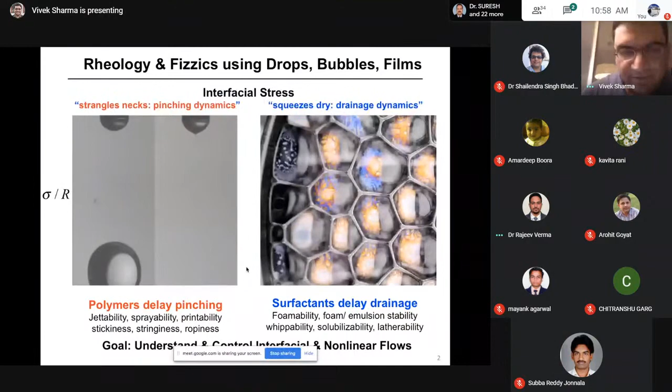And let me just check if you can see the movies as well. Yes, yes, they are moving. And now I can see slide number two. Okay. Yeah, the animation is also here. And is there a lag? So, I'm going to play the second animation now. Yes, we can see it. The colors are changing. Okay. Perfect. And you see the entire screen. Yeah, we are seeing the entire screen. Okay. So within a few minutes, we shall be starting with the session at 11 sharp. Okay. Yeah.

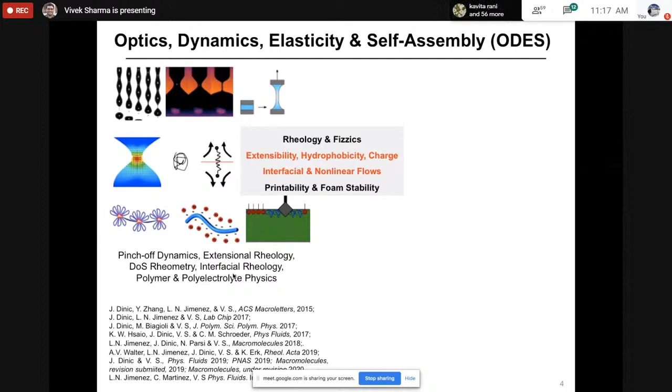I mentioned briefly that our group also spends a fair bit of time and effort on understanding foam film stability, and in some sense, both these key projects involve interfacial and nonlinear flows. They involve questions that are related to hydrophobicity and charge effects, and I mentioned some of these yesterday. And these are all rather practical problems, but we pursue them with an eye on some very fundamental questions about polymer science on the left-hand side and surfactant science on the right-hand side, as well as fluid mechanics.

So in the first 6 years or so of my tenure at UIC, we tried to focus only on either polymer solutions or on surfactant solutions, whereas in the last year or so, also motivated by a number of broader problems in environment, health, food, and so on, and the funding that has been coming from industry, we are now motivated to think about multi-component complex fluids.

And my overall quest is that all the information that I'll provide to you today is going to be helpful in creating meat and dairy alternatives, where we'll use the knowledge of how polysaccharides and proteins behave to maybe get food materials that have the nice texture, mouthfeel.

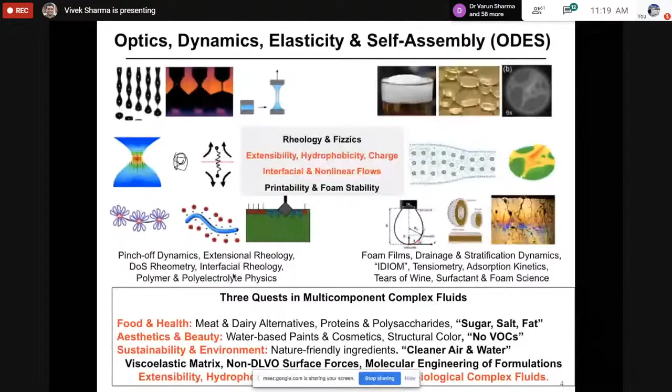All right, so I'm going to venture to define some of the terms that we'll be repeating again and again, and maybe the next 5 or 6 slides are at a very introductory level, so you can think of these as a quick revision. So rheology is a study of response to deformation. And when we think about response to deformation, we can define it in the following sense. We poke a material and then we measure the response to either an applied stress or an applied strain.

So the key idea that we want to remember is that when we apply a particular stress and we observe a particular strain or strain rate, there is typically a proportionality that is based on material properties, and understanding what those material properties are in context of design of new technologies as well as processing is one of the key aspects of molecular engineering or formulations. There's going to be a fair bit of mention of non-Newtonian fluid mechanics and how we characterize rheological response, especially extensional rheological response.

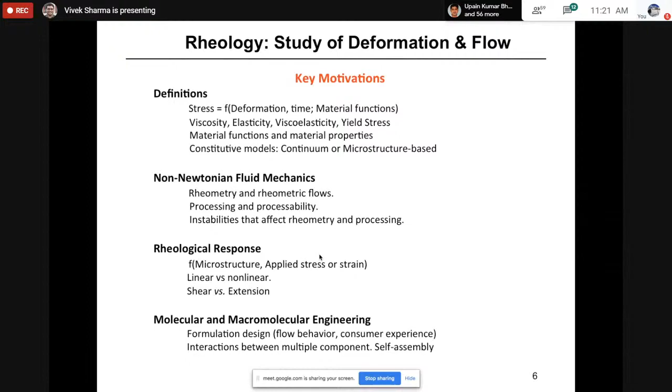And then hopefully through those discussions, you'll see how we combine these ideas, macroscopic measurements and molecular or macromolecular understanding to come up with new design principles, to come up with better formulations or utilize less material to get the same consumer experience of flow behavior. So if you go back and look at the key definitions for solids, stress is directly proportional to strain. This applies for both the tensile stress and the shear stress.

And in case of solids, this law is attributed to Hooke, whereas in case of liquids, perfect liquids, whenever we apply a deformation, we can't really get a strain, we get a strain rate because in response to stress, fluids flow. And in that context, the resistance to flow is characterized as viscosity. This is something we teach undergraduates, graduate students in all different courses, and I think is as familiar as can be to most chemical engineers, material scientists, mechanical engineers.

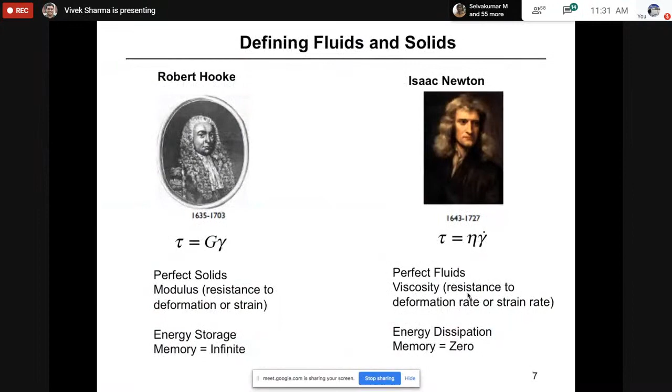Newton and Hooke were the two people who came up with the idea of what a solid is and what a liquid is, and they both didn't like each other too much. So they would have been appalled if they had survived to see Maxwell take their individual models and combine them into a model for what is the simplest model for viscoelasticity.

In the simplest model for viscoelasticity, Maxwell combines a dashpot, which has viscous response, with a spring that has elastic response. When you combine these together in series, you end up with a constitutive model called the Maxwell model.

If you apply a step strain, pull it by a certain amount and then stop, the gamma dot becomes zero, and you're left with a simple differential equation. If we solve this and define modulus as stress over strain, it gives you the idea that if you measure stress as a function of time, the amount of stress required to maintain that strain decays exponentially. The decay constant is this time scale called relaxation time, which in some sense is the ratio of viscosity to modulus, contrasting the viscous and elastic effects.

A Newtonian fluid has no memory - as soon as you stop the flow or deformation, everything stops. Whereas in a Maxwellian fluid, if you apply a certain strain and then stop, it can recover part of the deformation.

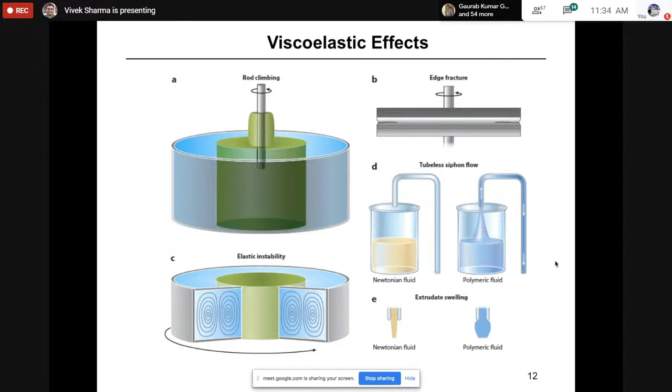They're expected to have a high shear viscosity at low rates that allows them to stick to a substrate or wall if it's a paint, or to not flow too much if it's a cosmetic poured into your hand - a hand cream, lotion, shampoo, or conditioner - it's supposed to pile up. However, when you're trying to dispense or spray it, it's desirable to have as low viscosity as possible. That's something you've also seen in toothpaste, where squeezing the tube makes it more mobile so it comes out, but once it's on the brush, it recovers its high viscosity and stays there without flowing away.

So most of the time people think about shear thinning and design everything based on it. And the key idea that I'm going to emphasize again and again is: this measurement alone is not enough.

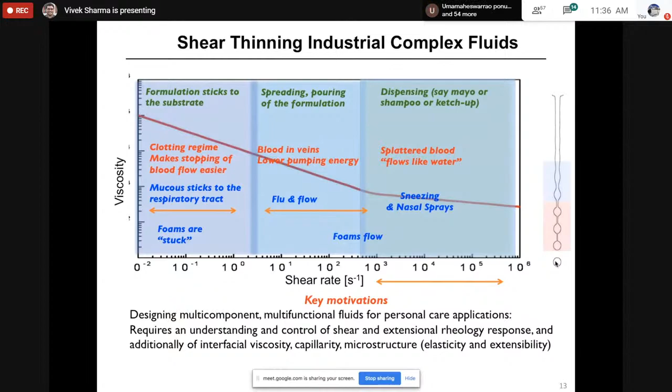Materials that have the same or similar shear thinning behavior can be quite distinct in terms of processing and additive manufacturing, especially if extensional deformations are involved, especially if drop formation is involved. I'll discuss why in coming slides.

In a lot of applications I'm interested in, paint forms a pretty good example of a multi-component system. Paint or ink usually has a pigment, a polymer, and other additives. There's a range of things we need to control for. We desire high viscosity to prevent pigment settling at low shear rates, whereas when we're really using the paint, by brush, roller, or spraying, the deformation rates are high, and it's desirable to have low viscosity that leads to less power consumption. If you're using a roller yourself, lower viscosity will mean you won't get tired as easily.

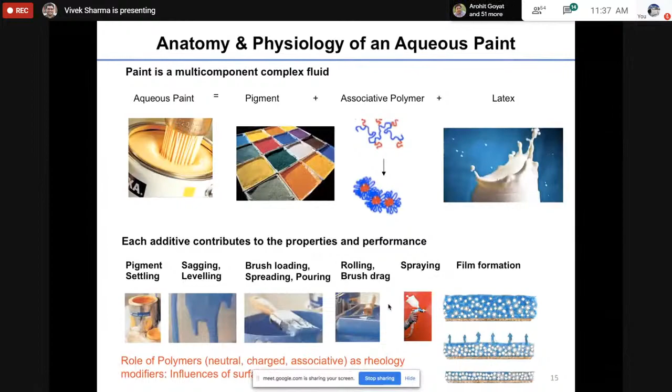Understanding the role of polymers in manipulating flow behavior is a key aspect. This is important not just for architecture paints but also for designing nail paints. Just like architecture paints, nail paints also tend to be designed to have similar shear thinning behavior.

They keep a similar viscosity versus shear rate profile, which saves a lot of headache in terms of changing processing conditions when going from one color shade to another. Most of these nail paints have nitrocellulose as a polymer additive, with an organic solvent that evaporates, which is why you can smell a strong volatile organic compound when using nail polish. There's some motivation now to replace this with aqueous based nail paints.

Here we were interested mostly in showing that even though there's accounting for pigment settling to brush drag through designing shear viscosity versus shear rate plots...

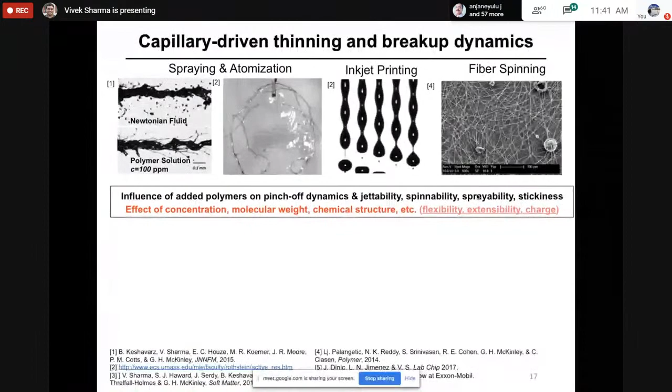So what we are most interested in is understanding the influence of added polymers on pinch-off dynamics, jettability, spinnability, sprayability, and stickiness, and how these affect dispensing behavior.

Now, if I look at a liquid jet issuing out of a nozzle, most of you have seen a liquid jet every time you turn a tap on. What you can visualize, if you had access to a high-speed camera, or in this case strobe imaging, allows a time resolution of a microsecond.

Here is a water jet, and as this water jet issues out of a nozzle, eventually surface tension-driven instabilities arise, which cause the neck to have a sinusoidal instability that results in formation of droplets. You can see very nicely a satellite droplet forms, a large primary droplet forms, and if you examine this movie, you'll see that before pinch off there's a very nice cone that forms, and that cone converts into the satellite drop.

If we add a small amount of polymer, 100 ppm or a few hundred ppm, that changes this breakup dynamics completely, and now you don't have any of those satellite drops, and pinching takes maybe slightly longer.

If you can avoid satellite drops, that would save a lot of money when you're trying to spray paint things, and it also saves a lot of extra fertilizer, insecticides, and pesticides that get blown away because the drop size is too small, so they can't really land on the plant and lead to all kinds of pollution.

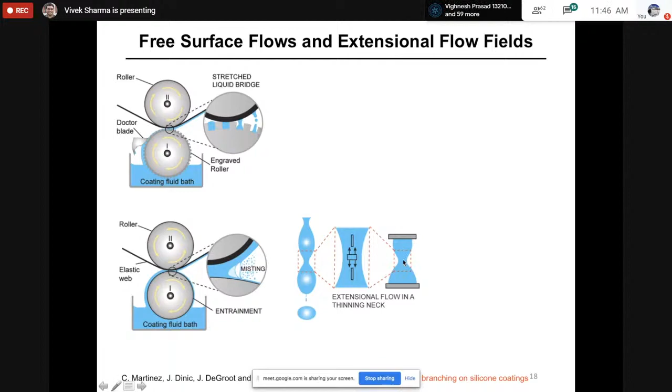So it turns out, in both these cases, there's formation of either a stretched liquid bridge with a neck, or a cylinder that converts into a sinusoidal shape that again has a liquid neck. In these necks, as the liquid is being squeezed out, the flow field is such that a control volume will get stretched in the direction of flow. Such flows are called extensional flows.

Those flows are going to be very important, especially when free surface flows or this kind of liquid transfer is involved. Similar flows also arise every time you coat something, dip coat something, or deposit something on a surface. In this case, the additional extensional flows arise because as you approach a free surface, the control volume gets stretched again. So understanding the response to extensional flows is quite important in all these scenarios.

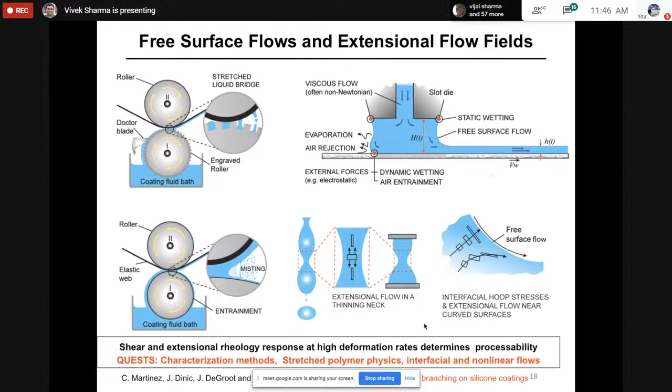And yet, not that many people focus on it. So if we now think from a polymer physics perspective, the molecular response, or macromolecular response, to shear flow can be understood as follows.

A typical shear flow can be created by pumping fluid through a pipe. When you pump fluid through a pipe, there's a no-slip boundary condition at the surface, maximum velocity at the center, and that creates a parabolic velocity field.

On the other hand, if you move the top plate and keep the bottom plate stationary, the momentum transfer in this case is in the z direction. The velocity gradient is in the z direction while the flow direction is in the x direction. So flow direction and velocity gradient are perpendicular to each other.

It's a quintessential shear flow. By controlling this velocity and knowing this distance, we control the shear rate. For that particular shear rate, if you measure the stress, the ratio of stress to shear rate gives you viscosity. Newtonian fluids have constant viscosity. Polymer solutions are shear thinning, their viscosity decreases with increase in shear rate.

The reason viscosity decreases is that if you think about polymer coils exposed to this kind of shear flow, they get perturbed. When perturbed, instead of being a sphere-like shape, they become a little anisotropic and can align with flow, making resistance to flow go down. When you stop the flow, entropically, polymers want to be in their unperturbed state, so the elastic forces bring the polymer chains back. But it takes a finite amount of time that depends on the background viscosity.

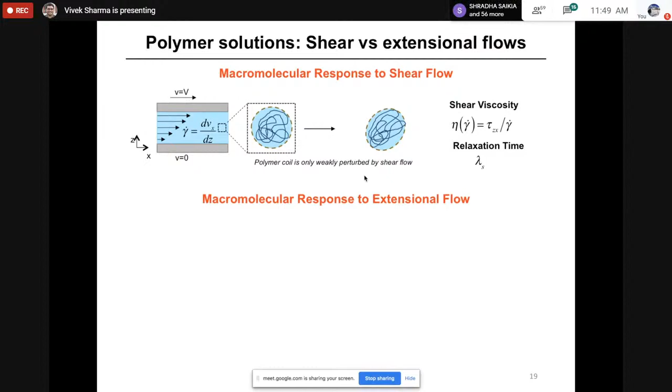What is described in less detail is the macromolecular response to extensional flow. As I said, extensional flows arise whenever you have liquid necks where the squeezing flow generates a velocity field with a velocity gradient in the direction of flow. Similar extensional flows arise every time you have a contraction, in porous media flow, or flow from a large tube into a nozzle, as would arise in every 3D printing situation. Yes, there are extensional flow elements involved.

In extensional flow, because the velocity gradients are in the direction of flow, polymer coils can get stretched quite a bit. There's something called the coil-stretch transition that can take place. When it does, you get a hydrodynamically extended object which provides much larger resistance to flow. The resistance to this extensional flow is called extensional viscosity. It's different from shear viscosity, except for Newtonian fluids, where extensional viscosity is three times shear viscosity.

So if you measure shear viscosity for a Newtonian fluid, you know extensional viscosity because it's a factor of three higher. In polymer solutions, though, extensional viscosity can be orders of magnitude higher, up to 1,000 to 10,000 times higher. This means that if you do shear measurements, a simple way being to take fluid between your finger and thumb and move them backward and forward parallel to each other, that simple shear will show the fluids are similar, maybe water-like. If you add a small amount of polymer to water, both appear water-like in shear.

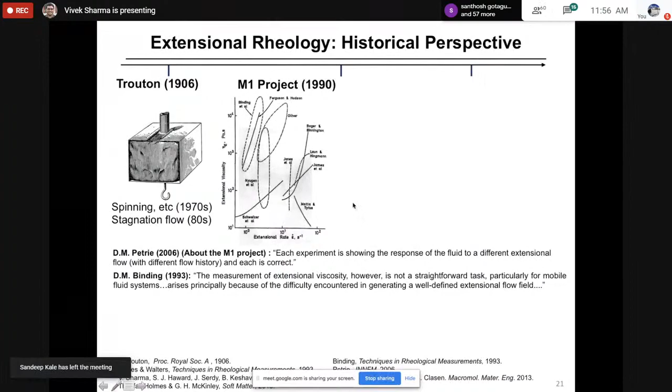Most of these fluids are very high viscosity fluids - the M1 fluid was a very high viscosity fluid. When we think about sprayable paints, inks, or sprayable insecticides and pesticides, the actual viscosity values are rather low and the extension rates are rather high, and most of these techniques can be used for those. In 2015, I summarized all the different techniques that can be used for a given shear viscosity, and here's a map of those different techniques.

When I was a postdoc at MIT, we tried to develop a jetting-based rheometer to get to these high rates and low viscosity fluids. It turns out that when you have viscosity within 10 times water viscosity, it's easy to image this jet as it issues away from the nozzle. But if you increase viscosity or viscoelasticity, the jet flies to such long distances that the experiment becomes hard to control.

In 2013, Clasen wrote a paper saying that unfortunately, extensional flow is difficult to access experimentally, especially for solutions of polymers with low viscosity or relaxation time - really low viscosity systems that are used in inks and form the basis of formulation design in cosmetics and paints and so on.

That remained a big challenge. In the food context, Fischer and Windhab summarized it again around 2013 - I mention 2013 because that's around the time I started my research group. What Fischer and Windhab recognized was that approaches aiming to introduce extensional geometry are extremely useful to understand the material, but they're complicated by the fact that measuring devices are expensive, do not operate on the production time scale, and do not provide instrument readings that can easily be transferred to the process or to the baker at 4 o'clock in the morning.

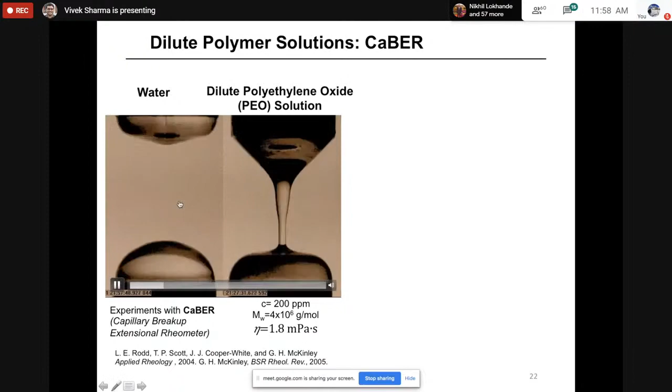So here you see a comparison between water and PEO solution. Even though there's only 200 ppm of PEO added, it delays the pinch-off considerably. Shear viscosity is only a factor of 2 times. So if I took another Newtonian fluid which had viscosity 2 times water viscosity, that would have also pinched off or broken off at a much shorter time scale. So it's clear that polymers produce some viscoelastic stress that delays the pinch-off.

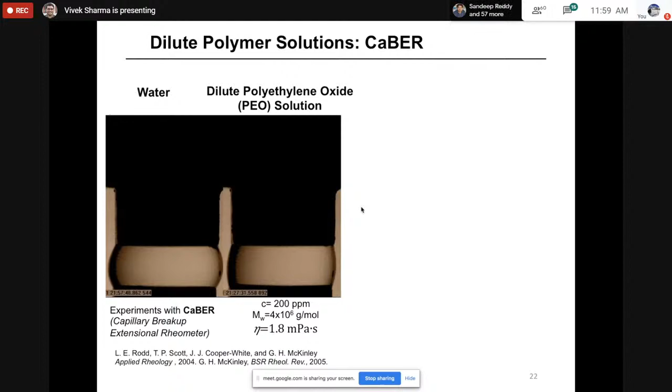And if we examine the neck thinning dynamics, it's well established now that we can learn about that viscoelastic response, and that viscoelastic response is based on extensional rheology. However, for CaBER, you require around 50 milliseconds to stretch a liquid bridge. And even for water, even before the stretching is complete, the pinch-off takes place.

And so for low viscosity fluids, many of the actual inks that are used in every place from bioinks to photovoltaic inks to inks used in inkjet printers, those fluids lie in this regime that is inaccessible in CaBER. So paint companies, cosmetic companies that I've talked to are all struggling with the same problem, that they acquired CaBER, but they couldn't make measurements for many of their actual products.

So when we started out, we wanted to analyze the material, measure the material properties that determine processability. To do that, we had to really understand how to design an instrument that could do this measurement. And our design is based on a deep understanding of fluid mechanics, self-similarity, and pinching dynamics of complex fluids. I'll try to summarize these as quickly and smoothly as possible. And then what I'll show to you today is that there's a fair bit of polymer physics information that can be garnered once you understand the flow physics and you can do these experiments.

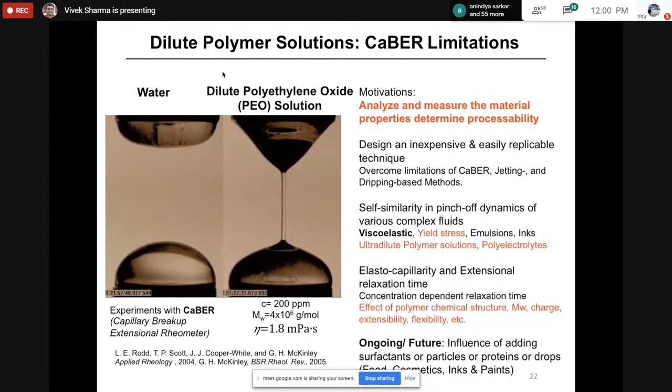The method that we created, we call it dripping-onto-substrate rheometry. And my claim, a claim that you can verify easily today, this afternoon, this evening, is that if you have a camera, even your cell phone camera, even if you're a theorist, you can replicate these experiments and have access to extensional rheometry from today.

So what we do is we create a liquid bridge which looks similar to the liquid bridge that's found in CaBER without using any moving parts. So we take a nozzle, place it at a fixed distance from a glass slide or a substrate, release a finite amount of fluid so that you get formation of this nice hourglass shape. The neck is thinner than the sessile drop and the pendant drop.

The capillary stresses take over, they squeeze the neck, pushing the fluid out, and that neck thinning dynamics is governed by the same balance of forces that applies in CaBER or the stretched liquid bridge configuration or in jetting or in dripping. And by analyzing this neck thinning dynamics, we can make measurements of material properties that influence processability, extensional rheology response, and so on.

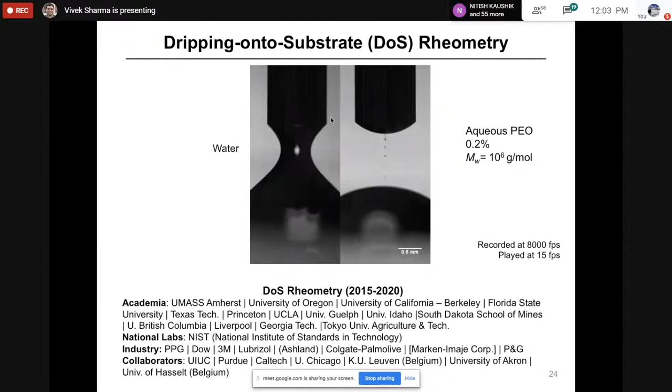So now the other companies, other industries and academic groups, even the groups that have their own CaBER devices, have adopted DoS rheometry. And the key aspect of DoS rheometry is enshrined in these four images. So for low viscosity fluids like water, the neck shape turns out to be this cone, and I also showed you a similar cone in the jetting.

This cone formation is signature of what is known as inertio-capillary thinning. So inertia and capillarity are playing a key role here. If you increase the viscosity, go from water to honey or glycerol, then the neck shape changes completely and it becomes a cylindrical neck. So these are both examples of Newtonian fluids. If I look at radius evolution with time, it decreases with t to the power 2/3. Here it decreases linearly with time.

On the other hand, if I add a small amount of polymer, like the examples we considered before, then this viscoelastic fluid, if we just think in terms of viscosity, still has low enough viscosity that it should behave like an inertio-capillary response, but it tends to give you what is similar to a visco-capillary response. Even though the neck shape is similar to visco-capillary response, the radius evolution gives you an exponential decay. And so that exponential decay can be fitted to get a relaxation time.

Lastly, many non-Newtonian fluids, many power law fluids, many formulations that have more than just polymer in them, they have other ingredients in them. These shear thinning systems tend to behave like power law fluids in terms of shear rheology, and also in radius evolution, they show power laws. But in terms of neck shape, you can see formation of these two cones. So there are very distinct time scales, very distinct pinching dynamics and topology.

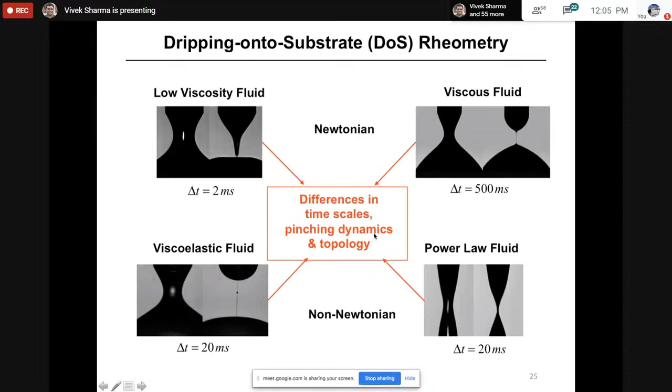And Jelena and Nallely went ahead, and this was early in the game. They went ahead and tried every fluid they could find in their kitchen and in their cosmetic cabinet. And you can see we have everything from printing ink to chocolate syrup and molasses that behave more or less like a viscous fluid. So you get cylindrical necks, whereas here is a list of polymer solutions which show you very nice, again, cylindrical necks, but the pinch-off dynamics has elastic thinning.

There's also a comparison between egg yolk, which is viscous, and egg albumin, which is viscoelastic. And in the lower level, you see many of the commercial formulations where conditioner or mayonnaise or ketchup or hand cream tend to show a formation of these two cones.

So if you want to go back and look at the actual fluid mechanics or force balance, there are four primary forces that are relevant here. Inertia, which is density times velocity squared. Velocity is the radius evolution, gives you r as a function of t, and this is just the time derivative of that. Capillary stress is the stress that drives the flow. As the neck becomes thinner and thinner, capillary stresses go higher and higher.

The viscous stresses, in this case, are these extensional stresses. So you have extension rate. The extension rate is given by r dot over r. So again, it can be determined from the neck dimensions. And then if you have polymers present, there can be additional viscoelastic stresses that can be modeled using your favorite polymer model. So if you have just water, then we get an inertia-capillary balance, and that gives this radius evolution of t to the power 2/3, and water just breaks rather quickly.

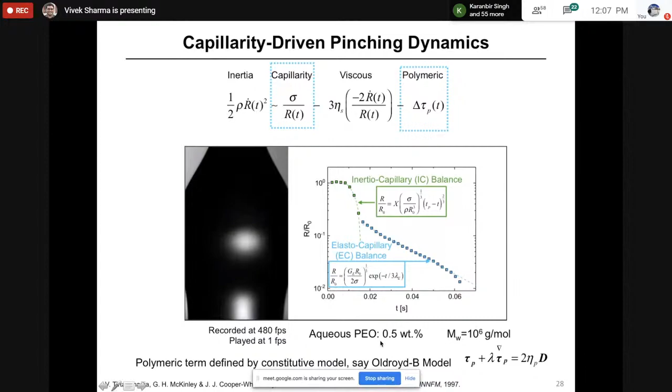But in case of polymers, there is a second regime that arises that gives you a balance between elastic and capillary stresses, and this elasto-capillary balance results in an exponential decay. Here the data is plotted on a semi-log axis, and because of that the exponential decay appears linear. By fitting this linear regime, we can get a measurement of extensional relaxation time. In this particular case, the polymer term is defined by, say, an Oldroyd-B model, which is a fancy version of the Maxwell model that I'd mentioned earlier.

Right. So one of the first things we did was to make measurements for a polymer solution. That's a dilute polymer solution. What that means is the number density of polymer coils is low enough that each polymer coil is far away from other polymer coils. So there's a concentration called overlap concentration, referred to here as C star. That's a concentration at which the number of coils is just enough that they start to touch each other or overlap. At overlap concentration, the polymer solution viscosity is 2 times solvent viscosity.

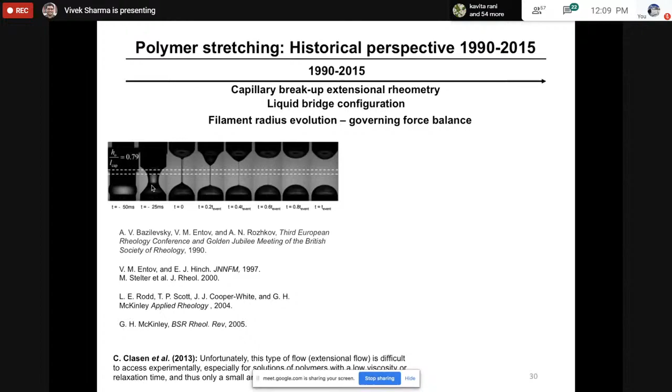Now, I mentioned that in CaBER, we are not able to make this measurement because CaBER really relies on using a laser sheet. And if your thinning and pinch off happen before the full extension is accomplished, which is true for all the dilute polymer solutions, you don't get anything. Furthermore, what happens in CaBER is this initial regime is always missing. It's always missing because most of that transition happens while the liquid bridge is still being stretched. So a lot of theories that have been developed to understand what might happen that triggers formation of contribution of viscoelastic stresses can't be verified with CaBER that easily.

As the polymer coils get stressed in this extensional flow in the fluid neck, they can eventually reach a stage where they are almost stretched to the extreme limit. In this case, they resemble more or less a solution of rods in a fluid. And solution of rods in a fluid, again, have a Newtonian-like viscosity, but that viscosity is much higher than actual polymer solution viscosity, shear viscosity, and it's called the terminal extensional viscosity. And this final regime is called finite extensibility regime, justified on the basis that polymers can stretch only so much. So every now and then we are able to see this regime, but finite extensibility regime often falls below the length scale that can be resolved optically.

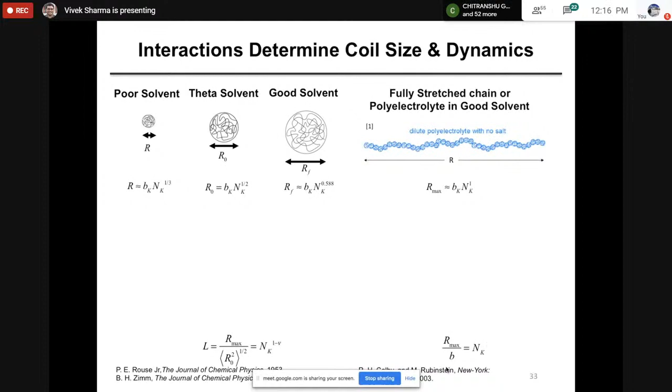The ratio of R max to R naught, or RF, is called finite extensibility or extensibility parameter, and that depends on NK as well as nu, which could be 0.588 or half depending on whether you start with theta or good solvent. The ratio of R max to B is NK, or number of Kuhn segments, and that determines global flexibility. For some rods, flexibility is low, so NK is low. For flexible polymers like PEO, NK is pretty large.

So what we're trying to understand is how this transition from 0.65 to 1 can be explained. I just mentioned to you these different regimes.

The single chain dynamics can be described in the following way: it depends on two things, coil size, described here as R squared, and the friction coefficient of the chain, or the drag coefficient of the chain. We teach this to undergraduates in fluid mechanics class, something called Stokes law.

Stokes law allows us to calculate drag on a single sphere. What Rouse said was that if we calculate drag on a single sphere or single segment, it's going to be viscosity times size of the segment. This comes directly from Stokes drag. Then we should multiply it with the total number of those segments. That's Rouse's scale.

Zimm later identified the fact that if you move one bead or one segment, it creates a velocity disturbance, and that creates a hydrodynamic interaction between segments. So the actual friction coefficient for the entire chain is not just this simple summation. What he instead used is the idea that the entire coil behaves like a bead, so this is NK raised to power nu, which could be NK to the half times bk for a theta solvent, multiplied with coil size.

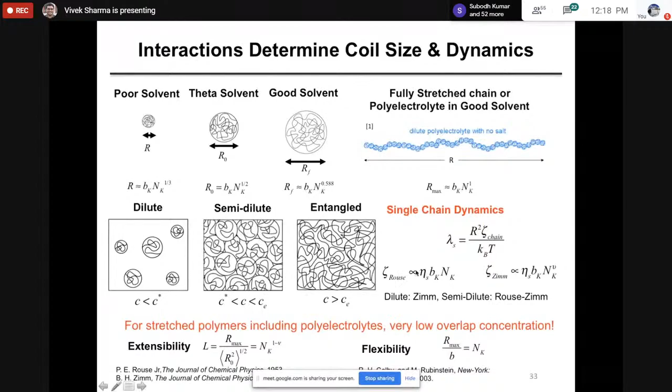Experimentally, it was found that in shear rheology, dilute solution behavior is Zimm-like. In melts, it's Rouse-like. In semi-dilute solutions, which are intermediate, it seems you need to account for local behavior using Zimm theory and global behavior using Rouse theory. Again, the details of this are relatively involved.

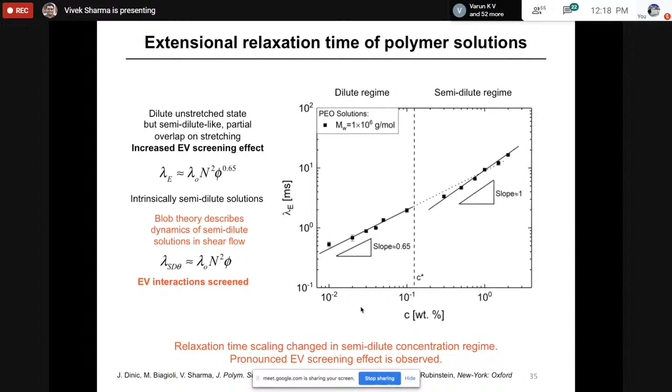So I'm going to skip some of these details and essentially mention that by using blob theory and a detailed understanding of polymer physics, we were able to show what leads to 0.65 and 1 concentration dependence. My student Jelena, who was an overachiever, really went and verified that you do get a slope of 1 for many different molecular weights.

What is more interesting, though, is the fact that if we have the radius evolution data, from that we can get capillary stress. We can also calculate extension rate. By taking the ratio of stress to rate, we get an effective extensional viscosity. I mentioned for dilute solutions, the shear viscosity is less than 2 times water viscosity, so less than 2 times water viscosity is 2 millipascal second.

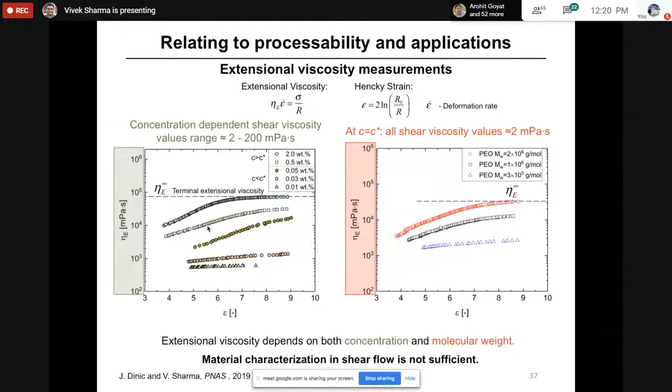But the key takeaway from all my presentation is material characterization in shear flow is not sufficient, especially for dispensing applications. It's important to characterize the extensional response.

We've spent a fair bit of time trying to understand the effect of polymer concentration, molecular weight, and so on. The critical question that arises is what happens if you go away from PEO and look at some of the other polymers used as rheology modifiers.

One class of materials used quite a bit is polysaccharides or cellulose derivatives. These are usually sourced from plants, are water soluble, and typically biodegradable, so there's a lot of push to use this. Many of these are safe to eat, so they form essential ingredients in foods.

Here's a list of some of the most common ones. CMC, carboxymethyl cellulose, you can find in everything from construction to food stuff to toothpaste to denture adhesives to baked goods to beverages. Sometimes you make smoothies or mango shakes appear more pulpy by just adding polymer to them. They can create that kind of mouthfeel.

Same for HPMC, HPC, HEC, hydroxyethyl cellulose. We're going to spend a fair bit of discussion on that in the coming few slides. What you want to understand is it doesn't matter whether you're eating commercially made ice cream or using toothpaste or shaving cream. If you use Gillette, it has both HEC and PEO in it, which allows you to get the right kind of foam and so on.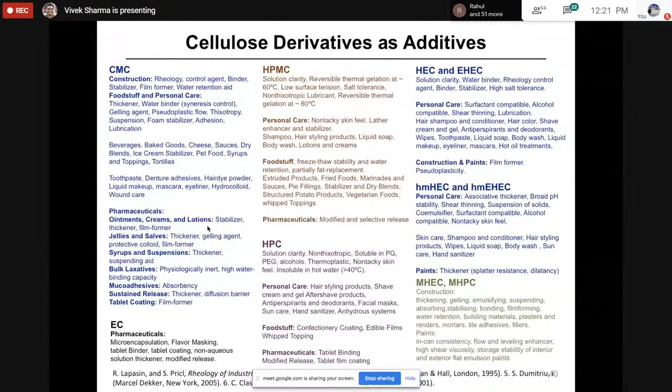So what my student decided to do was take PEO and HEC as two quintessential examples of polymers. She picked molecular weights that are comparable, but the Kuhn segment of HEC polysaccharide is much longer, 20 times this. The number of Kuhn segments is much larger in PEO, which is also the case because this is small, so this has to be large. This shows that PEO is fairly flexible and will be more extensible than HEC.

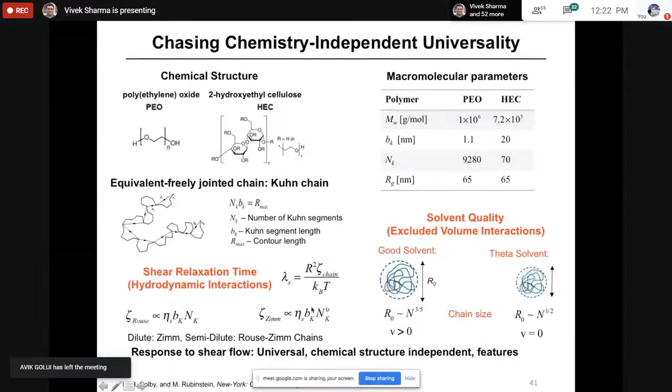But if you calculate the coil size, it comes out to be the same. If the coil size is the same, that means properties that depend on coil size, like the actual coil size as well as the relaxation time, shear relaxation time, are going to be similar. That's something we mentioned a few minutes ago. So if R squared is the same, and this formula also uses R, then eta s times R cubed is the same, so relaxation time is the same.

So if we make shear rheology measurements, what we find is below the C star, or overlap concentration, which turns out to be the same for these because coil size is the same, the behavior is indeed matched. This gives you an example of how chemistry-independent universality exists for polymer solutions. They give you the same response as long as the coil size is similar in dilute solution. Above C star, above overlap concentration, HEC can go to the entangled state more quickly, so it has a stronger slope. But let's just focus on dilute solution.

Based on this dilute solution, we have similar viscosity, and an estimate of the Zimm relaxation time is also the same. Now we want to figure out what happens if we take this system. Here I'm showing you an example where they have the same actual concentration, same measured shear viscosity, the estimated relaxation time is the same, and they are in water, so their surface tension is the same.

However, the pinching dynamics is very, very different. PEO has this delayed pinch-off, HEC does not. So you can't explain these differences based on just shear viscosity or relaxation time or surface tension effects.

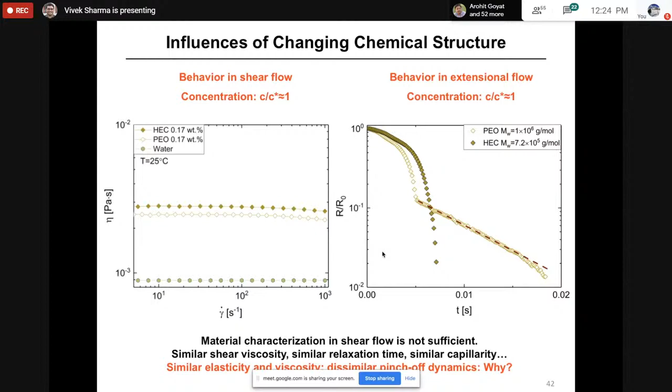To explain this, we really had to go back and dig through understanding of the coil-stretch transition and so on, so I'm going to skip through some of this. The key idea that comes out of all of this is that we were able to quantitatively come up with a criteria that tells you why we see such a sharp transition in the radius evolution for PEO. It undergoes what is known as a coil-stretch transition.

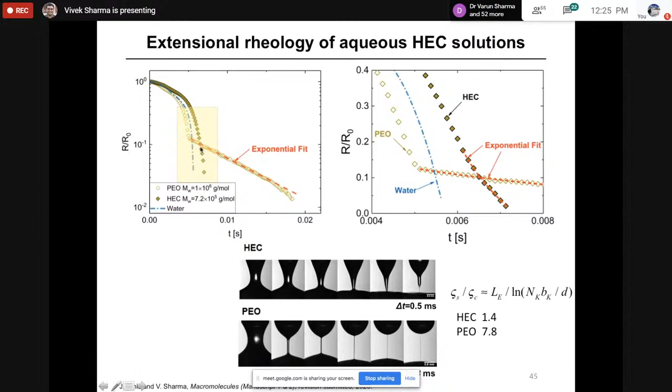The criteria for coil-stretch transition depends on the friction coefficient for a fully stretched chain compared to the friction coefficient for a coil. For something like PEO, which can stretch quite a bit, this number is large enough that we see a very pronounced elastic capillary regime. Some of this was published only recently, and you can find these in the macromolecules papers that just came out.

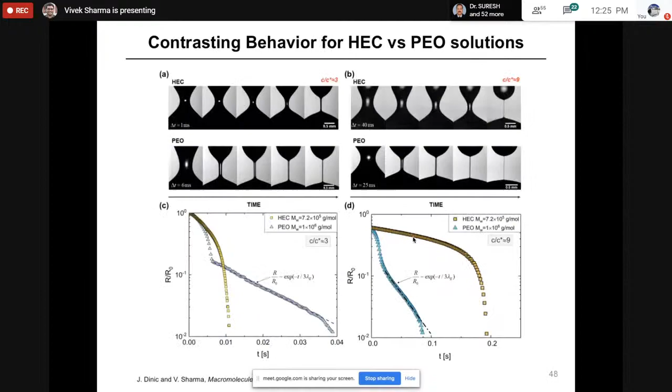Biologically relevant materials too, and we call this technique DoS rheometry. One of the key aspects of this technique is it's frugal. It can be used by almost anyone who has access to a camera. For low viscosity fluids, you do need a high-speed camera. For high viscosity fluids like honey or ketchup, you could do experiments right with your cell phone camera.

We've gone through a very detailed analysis of chemistry dependence, concentration dependence, molecular weight dependence of extensional properties. And the experimental data is unique and is already motivating other people to think about related problems. Now I'm just going to give you a very fast summary of some formulations, how they differ and how their differences are manifested more in extension than in shear.

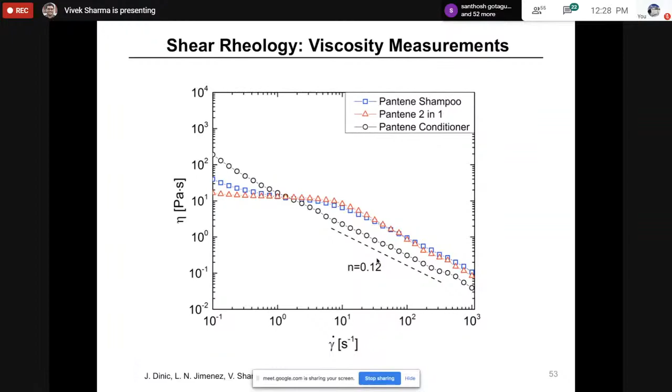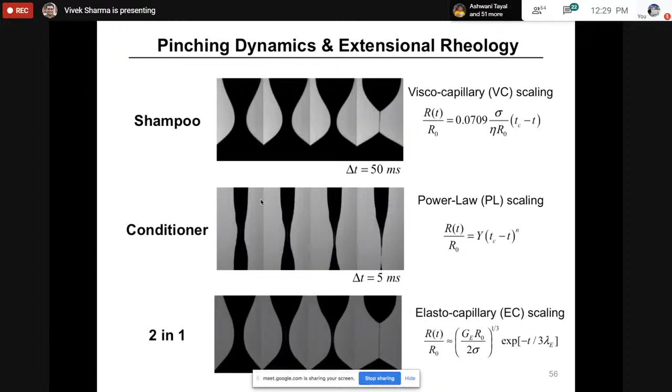The last example I'll give you is of cellulose gum that's used in food rheology. Here we are looking at cellulose gum in a glycerol water mixture. Cellulose gum is a charged polymer, so it shows some sensitivity. The shear rheology shows a lot of sensitivity to amount of salt. Again, to understand this, it's a charged polymer. In absence of salt, chains are stretched out, so you get coil overlap to happen at much lower concentration. But as you add salt, some of those charge interactions get screened, coils become smaller and smaller.

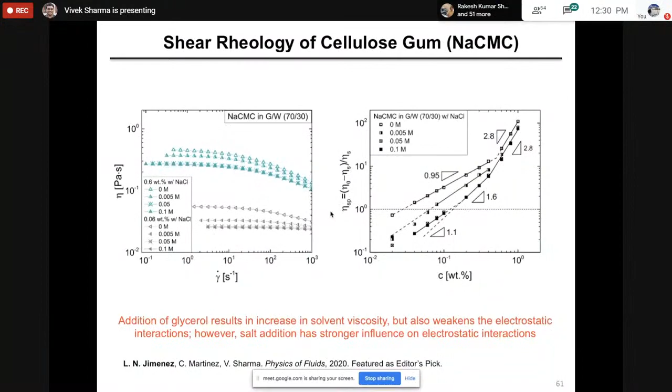So on adding salt, the overlap concentration, which is where this specific viscosity is 1, shifts to a higher value, and the overall viscosity also goes down. So shear viscosity gets affected quite a bit when you add even 0.005 molar of NaCl. This is something that's very important. Every time you're trying to make food formulations, we do add a certain amount of salt, and depending upon how much salt you like, your curry might turn out to be thinner or thicker just because of the thickener being a polyelectrolyte.

So we carried out experiments to measure the actual neck thinning dynamics, and it involves a fair bit of detail, but the summary from the extensional rheology characterization was that because the extensional properties depend on stress chains, and the stress chain size does not change when you add salt, we got more or less the same response in extensional rheology with and without salt. This is again something that's important if you're trying to think about designing things like dipping sauces or even dispensing fluids.

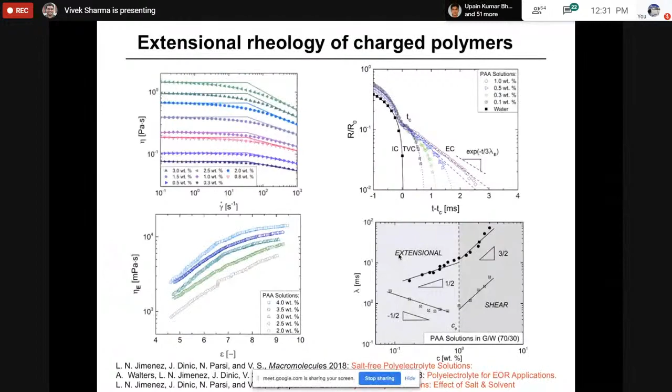My student Naili did a very detailed survey of studies of polyelectrolytes in terms of shear and extensional rheology—how salt affects those, how choice of polymer affects those, how choice of solvent affects those. Even though a lot of shear rheology was available for charged polymers, she mapped out a very grand range of properties in terms of extensional rheology, and some of these papers are in progress.

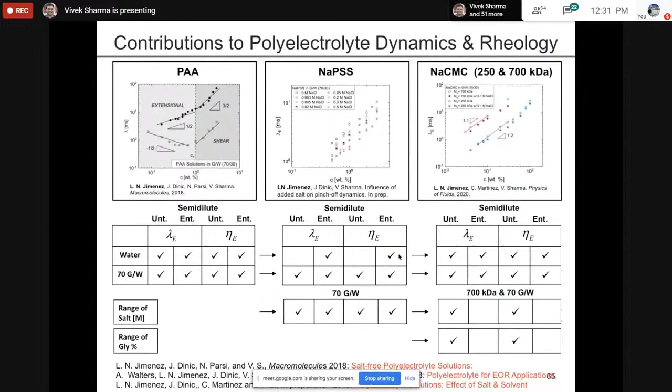What I would leave you with is the idea that DoS rheometry is pretty versatile. It allows us to look at formulation design, also investigate basic polymer physics questions, and I hope at least some of you would be motivated to start using some of the concepts we discussed today, and maybe DoS rheometry, especially if you're interested in designing your formulations for 3D printing, for fiber spinning, for determining spinnability, or for designing formulations used in food, cosmetic, or pharma industry.

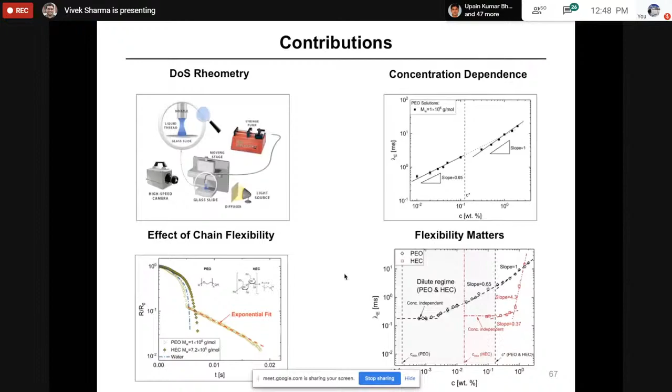There is one question: how does viscosity influence dripping onto a substrate? I think the answer can be given more simply by going back to this one. If you look at this image, with a low viscosity fluid like water, the pinch-off happens within a very, very short time - it could be a few milliseconds.

As you increase the viscosity, the neck thinning becomes slower and slower. If I increase the viscosity to maybe 100 times water viscosity, the neck shape changes, which you can visualize in dripping onto a substrate. The neck radius now decreases linearly with time instead of t to the power 2/3. Viscosity starts to play a role for viscocapillary thinning, but plays no role for inertia-capillary thinning. So for water and ethanol, there will be some difference because the surface tensions are different, and that changes the driving force for thinning, but viscosity will not be the reason for the difference in pinch-off dynamics between water and ethanol.

However, between water and glycerol, or water and honey, the difference is stark, because one gives you inertia-capillary and the other viscocapillary behavior. For glycerol, honey, molasses, or glycerol-water combinations, if you know the surface tension, you can map out the viscosity, or measure the shear viscosity, because for Newtonian fluids the extensional viscosity is just 3 times the shear viscosity. The bigger difference arises in viscoelastic or power-law fluids, where shear viscosity is not the only thing that affects things - the actual extensional viscosity matters, and all of that is correlated with what happens to the microstructure.

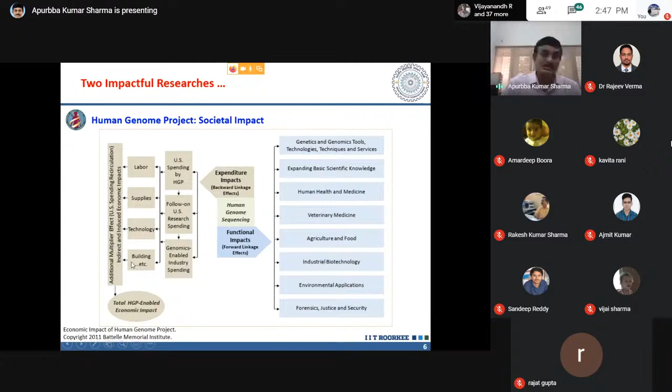It impacted so many areas like building technology, supplies, labor; almost every aspect of society was touched. If you see the functional impacts on the right hand side, people are now in a better position to design a medicine, to design food, and in agriculture, to design a particular crop or seed that suits a particular type of human being. For that we need the human genome data. Similarly biotechnology, industrial biotechnology, and scientific knowledge; now we are richer manyfold.

What we didn't know a few years back, now we know much more. So its impact is really very high. In fields of application like human health, you can now design a drug to suit a particular person, precisely. Many of you might know about targeted delivery of drugs.

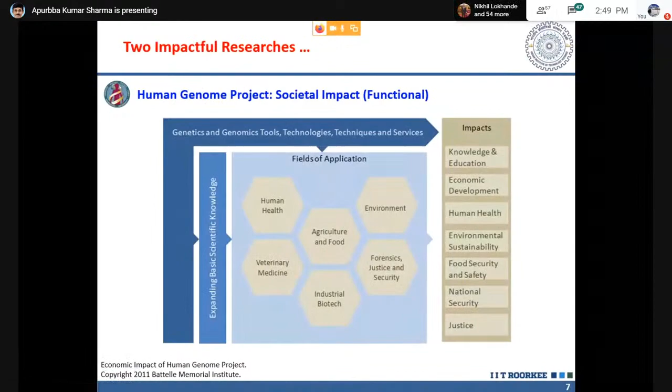So now, it is not only human, but also the veterinary industry, biotech industry, and almost all, including environment. So all aspects of our society got impacted by this Human Genome Project. And this might have influenced the policymakers or the scientists. If the Human Genome Project could give us this much impact, why not think in other ways? So this is where we stand with the human genome sequencing project.

So it is huge, and even if we do not talk about monetary terms, the scientific impact was immense, and the knowledge human beings could gain out of this project is enormous, never before. So therefore, this might have influenced another project, specifically the US people, to take up another project called the Material Genome Project. That was the Human Genome Project, and this is the Material Genome Project.

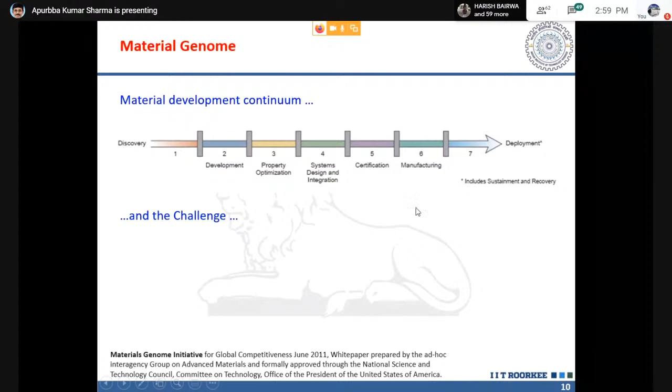Then manufacturing. I will be emphasizing most of my talk on this manufacturing part. Materials once developed have to be reshaped, worked upon, given a kind of shape or functionality. For that we need to manufacture them, process them. Only then will it go for deployment in some application, be it aerospace, shipbuilding, motor vehicle building, laptop manufacturing or whatsoever. Deployment can be anywhere.

Say polymers, we are using polymers for various purposes. Even for manufacturing shoes. Probably 50 or 70 years back, people were never thinking that one day we would wear shoes other than leather. But today, that is the order of the day. So deployment is there in that also.

Deployment is in different fields, and for those targeted deployments, we may have to design our material in a different or innovative way so that the particular functionality can be imparted or embedded into that material. That needs tremendous data, tremendous scientific knowledge. How to go about that? This is the challenge.

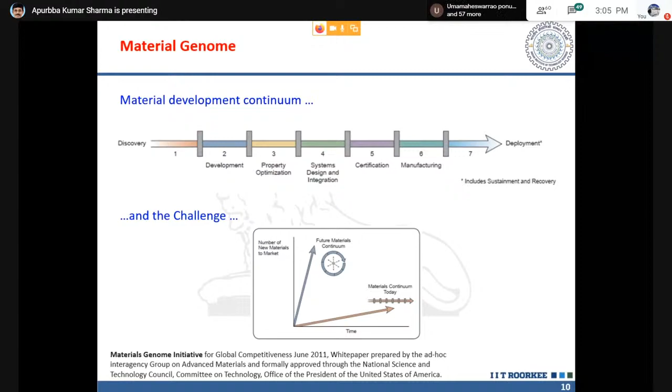And that is the very essence of this material genome - how we can have data, how we can design a new material by using previous data, by using different design mechanisms and different simulation techniques, and bring down the time of developing and deploying the same material. That is the essence of the material genome project.

So these are some of the things coming from literature. You can always Google this data; I have given the source also.

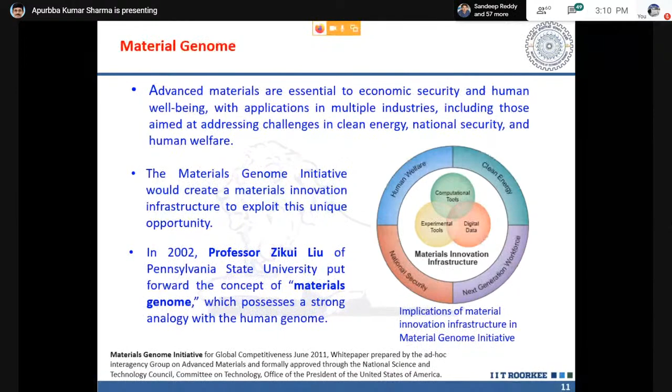Okay, so it affects all, and the credit of this concept, the material genome concept, goes to Professor Zikui Liu of Penn State University in the US. As you know, Penn State University is one of the leading universities in the world, not only in the US.

So what it aims to is increase the pace of discovery and deployment of advanced materials. That time gap between discovery and deployment should be as minimum as possible. And if we can do that, then probably we will be able to sustain competitiveness in the 21st century, because it is all about competition.

Nowadays, as you can see, even .com companies compete this way. If one website promises to deliver the material within 4 days, another company will say, no, we'll supply within 3 days. Another will say within 2 days. So it is all about competitiveness and time. They want to squeeze the time like anything. And whoever has the least time will win the race.

The material genomic project aims to reduce new efforts in computation, new efforts in designing a new material, and new efforts in establishing its properties for deployment. That's the whole crux of the thing. It will create a new era of materials innovation, offering the opportunity to discover, develop, manufacture, and deploy advanced materials at least twice as fast as today.

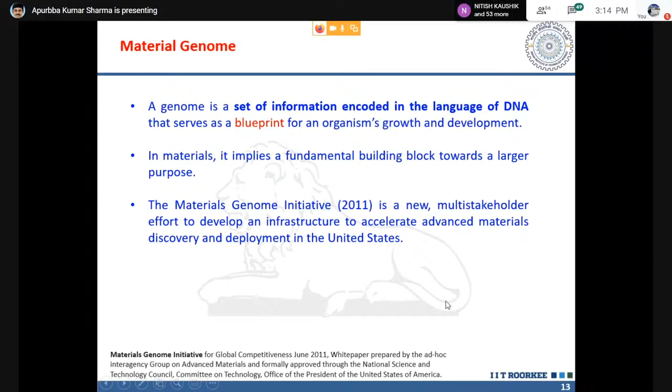Genome is nothing but, if we just try to understand what a genome is, a set of information encoded in the language of DNA, and that is the blueprint of any organism. Similarly, if we talk about material, there is some information which will carry the blueprint or the characteristics of the material. So in materials it implies fundamental building blocks towards a larger purpose. That's material genome. This initiative was started in 2011, again in the United States.

So this focus will better leverage the computational capabilities, data management, and integrated approach. When huge data will be regarding one material, there will be a huge amount of it, then their functionalities and all these things, and how it will be developed, how it will be deployed. For that also, it will be a kind of integrated approach.

Develop the tool set necessary for a new research paradigm, in which powerful computational analysis will decrease the reliance on physical experimentation. If we see why we need so much time, that's basically because of the physical experimentation. And until we do the experimentation, we are not sure about the properties, we are not sure about the functionalities, we are not sure about its consequences. So we need experimentation.

Without experimentation, certification is not possible, and those experimentation processes are very lengthy. But if we can have simulated experimentation, once one material is experimented, and we can scale it up or extrapolate it or use that same data for some other similar kind of materials, that will be wonderful. That may be possible through some advanced calculations and advanced analysis tools only. That can reduce projects from 10 to 20 years down to only 2 to 3 years.

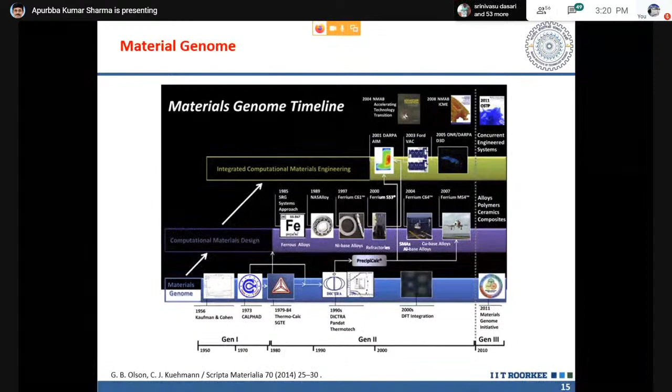So this is something like this - databases, different databases, and we can conceptualize this as phase 1, phase 2, and phase 3, with different prototype data from different calculations using different tools, like ThermoCalc, which is one very important and significant tool used in material science, and similarly DICTRA and other tools and experiments.

All this data is being used for designing a new material, put into the database to see how the new material will behave. For this concept generation also we need this data - so this material has got these properties, so now for this type of functionalities, I can design it this way.

So that is the concept generation, and then design it, model it. Model it - what is the percentage of this, what is the percentage of that, at what temperature should it be kept, and all these things. Then scaling it up, process optimization - that is very important, process optimization. That is what I'm going to talk about. We lose a lot of time in this phase. We develop a new material, but we don't know how to process it, and without processing, that material is useless. So this is very important.

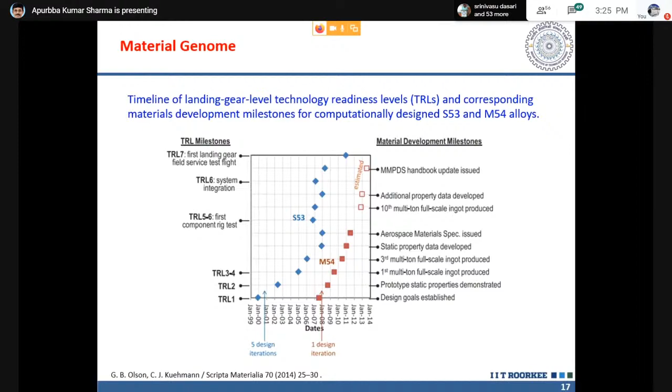So that's the advantage of material genomics - we are using the data, we are sharing the data. Somebody would have generated the data as far as development is concerned, somebody would have analyzed the data, and they are being stored and shared among them, and who will use which type of data for all those things. You can have a kind of master database like a crystal structure database - crystal structure is known for how many materials in how many ways. If all these things are available at one place, is it not very easy for all the users to use this crystal structure data straight away for designing the alloy, for designing new material, for simulating its property, for designing processing temperatures, and so on.

So that is what is being done - there will be a central database, with different physical layers, different small databases. Somebody will have development data, somebody will have design data, somebody will have simulation data, somebody will have experimentation data - all those things put into a big database. At the logical layer, people may be using this data for different purposes - somebody will analyze performance, somebody will use it for processing tests, and so on. So that's the huge advantage of this genome project.

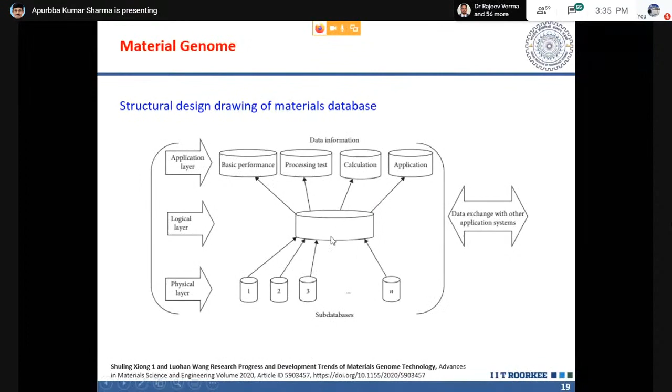Now, if I create a database and put these things in it, then when Dr. Rajeev or some of you 100 people listening to me will be processing, you can directly, readily access this data. Oh yes, this is there - A.K. Sharma and his group did this, so I can directly use this. This can be done from the journal data also, but that is a lot of process, a lot of things involved.

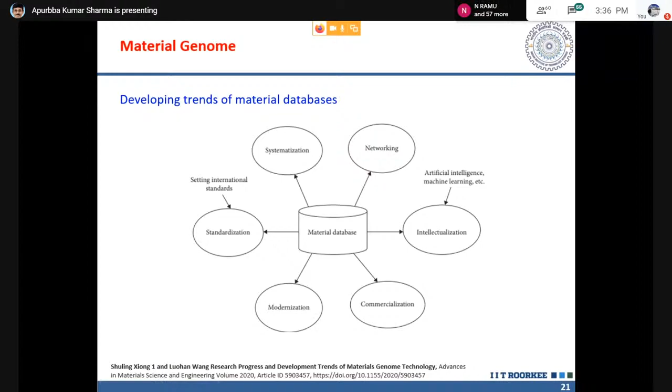But here, as you can see, you can probably have direct access. But how that mechanism will be done, how it can be made useful or workable, please don't ask me. Probably I am also not aware at this stage.

It is only my thought process. Had it been there, wouldn't it have been very useful, very time efficient, very resource efficient? Because without processing, a material is meaningless. Its processing is also equally important. And for new generation materials, whenever a new material is being developed, obviously the old processing techniques will not apply 100%. You will have to develop its processing technology also, but all data may help.

It directly as it is cannot be employed, but the history, the data, the simulation process can definitely help us. So that is where the material genome approach can help us. We can reduce tremendous time.

Like I was talking about S53 and M54, the landing gear examples I gave just now. One took 8.5 years and one took only 5 years to bring it from development till deployment. So that is a huge gain. Similarly, if this and many other things can be done, then our effort and resource requirement will be reduced. So it may help in time as well as economics.

Okay, so these are some of the parameters. Many parameters: discharge medium, material, microwave power, frequency, exposure time. Then the discharge, what is the viscosity of the medium? If it is air, a different kind of discharge will take place. If you replace air by some other gases, then a different kind of discharge will take place.

If you replace that by vacuum, then a different kind of discharge will take place, and accordingly the melting, evaporation or ablation of the material will be different. Similarly, not all materials can be done in a similar fashion. For glass, it is a different kind of behavior. For steel, it is a different kind of behavior. If you put a ceramic plate, again it will be different. We need material genomics. For all these things, we need data, and that can help us.

Okay, so right now for me, everything is new. We don't know how each material will behave under this discharge condition. There are some papers where they have seen different applications, from a chemical processing point of view, from a reaction point of view. But from a drilling point of view, where tremendous energy is required to ablate the material, that is a totally different distance.

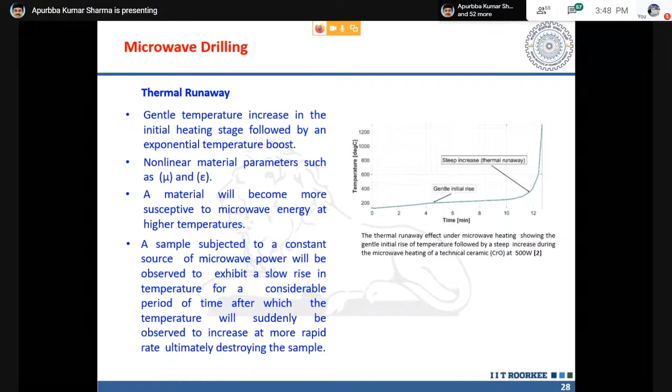And always Professor Jerby questions me, your holes look very bad, my holes look very clean, neat and clean. So he used to question me like that. But what he is not telling is the scale. What is his scale, and what is my scale? I am showing the holes or the damaged zone under scanning electron microscope, which is 2000 times or 1000 times enlarged, and his scale is just as it is. So this is 2 mm, 2.4 mm, or whatever. At this scale you will see everything looks good. You enlarge it by 500 times, you will get a hell lot of defects here.

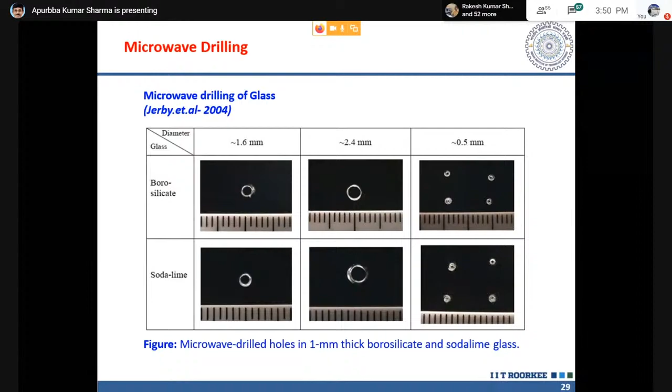So anyway, I am not trying to undermine Professor Jerby's work. He's still the pioneer in this field, and he has shown the way that yes, there could be another method for material drilling, and we are trying from a different perspective, with a different technique, a different approach. Some other people tried again, his group only. Then came 2012 onwards, we tried in our laboratory.

I joined IIT Roorkee in 2006. Then I started with microwave metal joining. Some people were laughing, why are you taking metal? Metal anyway should not be used with microwave. So again, it became a challenge for me. Let me try. I tried, and I got a patent in joining of metallic material by microwave in the same kitchen microwave oven. That patent was granted. Then I joined Inconel, I joined steel, MS, MS to SS stainless steel, stainless steel to Inconel, and various similar as well as dissimilar materials I have joined in this microwave oven.

So that was a breakthrough. Then I used microwave cladding, so that was also patented. That was again new data. Nobody did that so far. And we were the first globally to use microwave energy for developing cladding.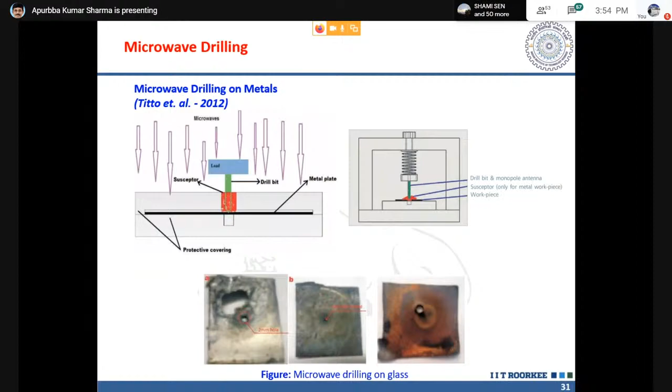He tried so many things like wood. He tried bones. He tried ceramic plates. He tried glass plates. Like n number of materials he tried. And therefore, whenever I talk about drilling, I always remember Titto very much.

And later on, of course, when we filed the patent, it was on glass. Okay, we could drill glass, but I made sure that Titto's name should be there as one of the inventors. So I put his name as one of the inventors for this drilling patent.

So this is the drilling process. This is the tool, and this is how that plasma channel is formed, or this microwave discharge that takes place. This is the metallic tool. And this is where we are keeping the target material for drilling. Here we are putting a metallic workpiece, and sometimes we put glass or whatever material we want. So this is the fixture and all these things. This is inside the microwave oven. You are seeing this view inside the microwave oven.

So how it happens? What is the physics of this? So let me very quickly talk about this. I think only 10 minutes are left. Very quickly I will go through this.

So when microwave is subjected to a material, what is the material property? So again, we go back to genome. The material property, crystal structure is there in the database. So we know what is the crystal structure. We know what are the characteristics. So the genome will help here. We need not go for new. Then depending on those properties, how the field will be generated inside this material will be determined by the material characteristics.

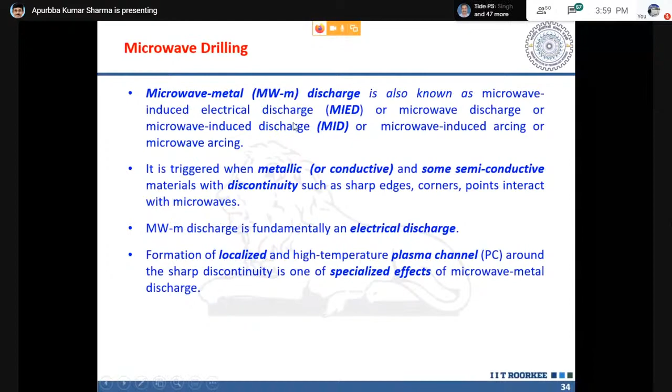So those are the sparks, and those sparks are created because of this. That charge is like the deflected electrons, and if we try to make it more intense, then this will create a kind of discharge that is called microwave metal discharge. And how it happens, let me tell you. This I'll skip. So the microwave is changing very fast, 2.45 gigahertz. 2.45 gigahertz means this many cycles per second.

So it changes. Microwave has got two components, one is electrical and one is magnetic. If we consider the electrical component, in one cycle it changes from positive half to negative half.

And if I keep one concentrator or one metallic tool there, the charges induced in that tool because of this microwave field will be something like this. In the negative half cycle it will be different. If it is a blunt tool, it is something like this, and if it is a sharp tool, it is something like this.

So this is what happens, and this causes this sharp edge. If you can see, electron density is more, so this causes discharge. We'll see what is the mechanism of this.

So this is a tool or the metallic concentrator, which is subjected to microwave, and the microwave is creating a field where at this tip the induced charge density is more, and therefore there will be a kind of plasma generated in this. That will cause the atmosphere to get ionized, and a plasma will be created.

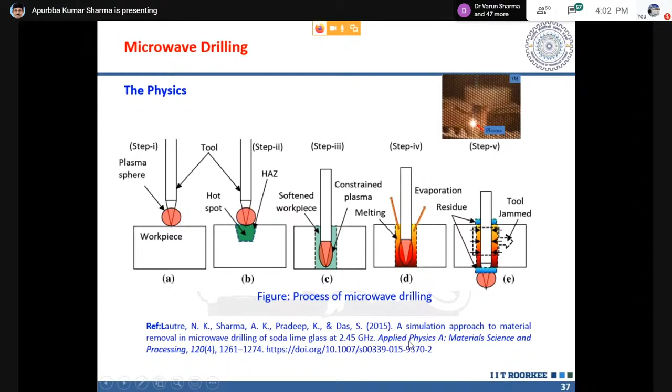Automatic system also, or maybe pulse based also. We can control this feed of this tool, the feed rate of this tool. So this is the mechanism of how drilling takes place, and this shows exactly how it happens.

So electrons get accumulated here. They ionize this environment around this tip. This is the tool tip. This is the tool, or also we call it the concentrator, because it concentrates the electron or the charge at its tip. And the microwave is inside the microwave oven.

So microwave is coming, and under the influence of the microwave field, these electrons are getting accumulated here, and it is ionizing the atmosphere here. And when it crosses some threshold, these electrons jump from here and go to the workpiece.

And here the workpiece is again metallic material, we are putting stainless steel or something like that, copper or whatever. And therefore they jump from this tool material to this, and this causes this plasma, and this causes this type of things. You can see this and this.

This is the experimental result, this is our theoretical postulation, this is inside our own picture. So we have tried to see it from different angles.

Oh, already 4 o'clock. Dr. Rajeev, we have some time sir, so we can extend it a bit. Yes, okay, maybe another 5 minutes, 10 minutes. Sure sir, 5 to 15. Yeah.

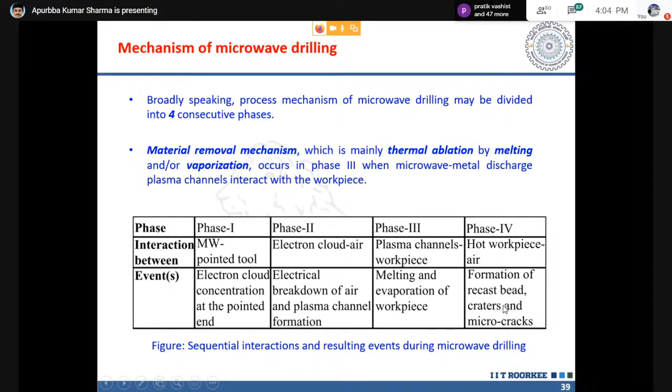So we have seen these things phase wise: phase 1, phase 2, phase 3, phase 4. In one case, the electron cloud or concentration takes place, then the breakdown of air, just as I have shown here. Electron concentration takes place, then breakdown of air, then plasma channel forms, and because of that hot plasma channel, the material gets ablated. So this is the sequence of events that take place.

So this is the actual tool, a pointed tool. This is the magnified view, you can see, this is the tool. This is where the charge gets accumulated. This is how we are putting it inside the microwave oven, this is the normal microwave oven, whatever you use in your kitchen.

So these are two materials we have tried: galvanized sheet, GS sheet, or stainless steel sheet. For that, different types of power we have used, something around 700. So 700 is the rated power, but actual power will come something around 550 to 600. The 700 is the rated power of the equipment, but we have measured and calibrated it with other mechanisms, so the actual power getting absorbed is something around 600.

So we used to keep a tool work gap of 1 to 2 mm. That is why at the beginning I said this is a non-contact type of machining, this is non-conventional machining. So we are maintaining a gap of 1 to 2. Sometimes we allow it to touch also, that is another thing. But generally we keep 1 to 2 mm gap, and exposure time is only 40 seconds to 60 seconds, or about 1 minute.

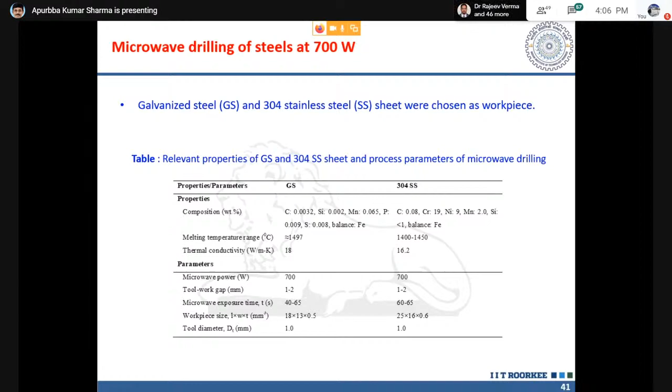And the metal thickness is around 0.5 mm, so it gets ablated to create a 1 mm hole. So we have tried to characterize those holes in terms of overcut, how the hole looks at the entrance of the sheet, and how it looks at the exit of the sheet. So all those things we have tried to see.

From this side is the entrance, where this concentrator is located, so we look at how this area is getting affected. This is the exit, so we look at how this area is getting affected. What is the overcut here? What is the overcut here? Circularity here, circularity here, all those things.

So these are part of our research, we tried those things. These are circularity at the exit, circularity at the entry, and similarly diametrical overcut at the entry and the exit. So all these things we have seen.

We have found that if we allow the material sheet for only 40 seconds of microwave exposure, we get an undersized hole, but if we use 65 seconds, we get an oversized hole. So that means the time of exposure has some influence, and we need to optimize it.

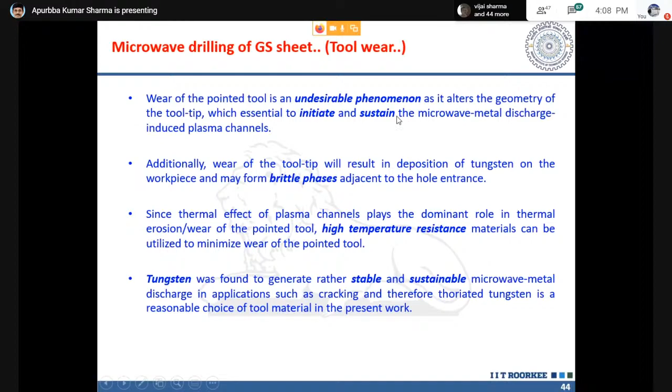So this is the kind of hole we are getting, and this is the profile. Some more examples are there, I'll show you. Then we have also seen tool wear — there is substantial tool wear. We could identify tungsten peaks here, even though in this material there should be no chance of any tungsten. So this tungsten would have come from the metallic concentrator, which was having tungsten. That way we try to correlate the things.

So these are some of the micrographs — SEM data. You can see this length is 0.5 mm, so you can see the enlargement. So our holes are also not that bad in comparison to Professor Zadvi's, and please remember, these are in metals.

We have seen the entry side and the exit side, both sides. Some characteristics are there — the entry side is generally exposed to higher energy, but the exit side to lower energy.

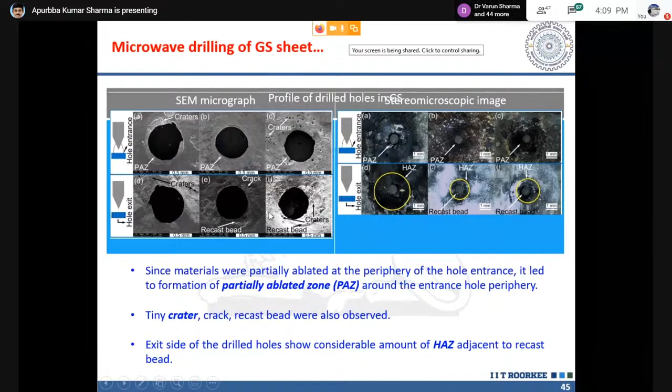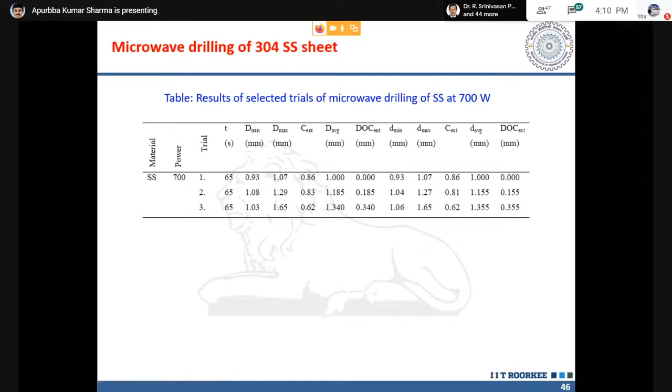Similarly, we have seen for GS also, that was a galvanized sheet. So for the SS sheet also we have seen the exit side and entry side, both sides, and we have found that circularity in SS is better. And entrance and exit overcut-wise, GS gives a more stable kind of performance. And if we see the thermal damage zone, that is also better in GS compared to SS. But with further optimization, we may get even better results in this case.

But at this moment, let me tell you that this process is not error free. As you can see, there are circularity problems, overcut problems, and some heat affected zone problems. I'm not the type of researcher who will say my process is the best in the world — then my learning would stop, and I would have that complacency, but I don't want to do that. I want to see what the problems are in my process so that I can perfect it and do a better job, so that tomorrow I can improve my process. That's my objective, and I wish all of you to have a similar attitude towards research, so that we will be able to further our research and improve it day by day, not by hiding our weaknesses or failing to tell others about the problems we face.

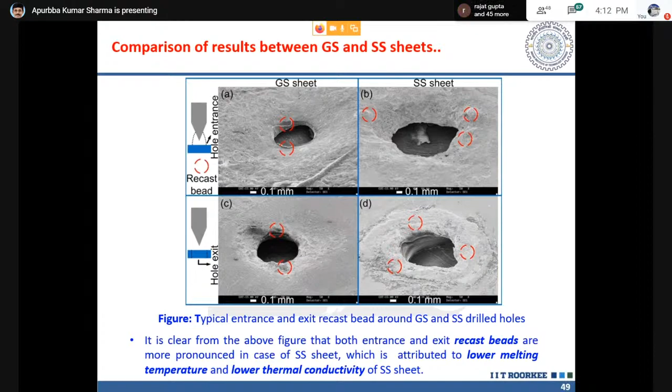So these are some of the holes we have done. Probably there is a lot of data, but I don't have that much time - I have another important meeting, so I have to meet one target today. I gave time until 4:15, thinking it would be over by 4 o'clock.

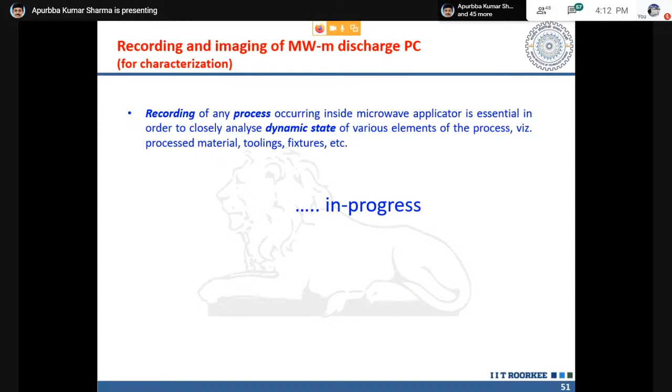But anyway, now messages have started coming, so I will go, but not before interacting with you for a couple of minutes or a couple of questions. Similarly, we try to record this process also, what happens when discharge is going on, how it looks like.

We wanted to have recording of these things, but our ordinary camera cannot record it as good. So this will be something like this. We have recorded it, but I'm in the process of developing a setup with 50,000 frames per second, or 1 lakh frames per second recording capability. I have already ordered the camera and am developing that setup.

So we want to see what happens in 1/50,000th of a second, inside this. Then probably it will give very interesting results, much more information. And probably in the next talk, if Rajiv gives me a chance, I will be able to share some more beautiful data, or much more advanced data.

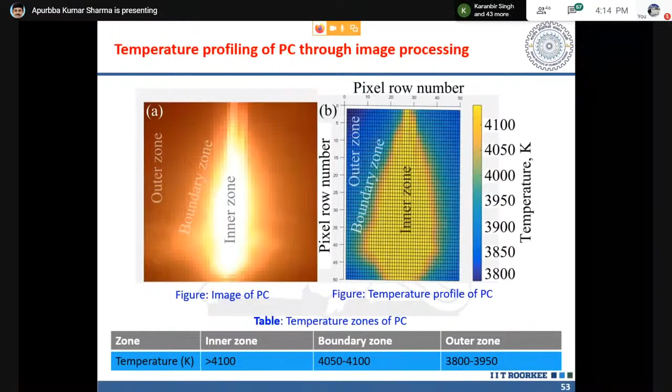So we tried all these things, but these are with our own conventional camera. The progress, work is in progress with the high speed camera. These are with our conventional camera.

So to conclude, probably what I must say is I have nothing to conclude on this. Material genomics I have not worked on, material processing I have worked on, so I have shared a few things. But it is not like material genomics should be only for design of materials - its boundary can be enhanced. That's what my feeling is, that's what I have understood by studying genomics, and probably you can have a better conclusion, better study on this topic.

One more thing I would like to share is that no data can be bad, no research output can be bad. Result may look bad, please remember. You may have a lot of heat affected zone, it looks bad. Doesn't matter, doesn't matter.

That is where I have seen that - that's why I will be able to improve these things. So when we sent that with a lot of heat affected zone, these kind of things to one journal, a very leading journal, one of the referees said this looks very haphazard or very dirty kind of thing. Another referee said, no, that is where his research is. It's like the first referee also did not say these are bad, but it's looking bad. But immediately the other referee said, no, that is where his research is.